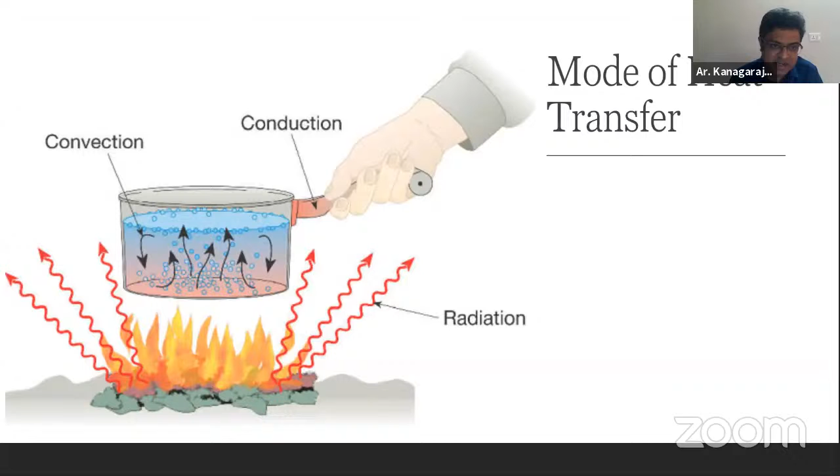When we talk about envelope, we basically revisit our 8th and 9th class physics. There are 3 modes of heat transfer, all of us know: conduction, convection, and radiation. And envelope is any surface which distinguishes the internal environment from the harsh external environment. It can be your roof, wall, windows, or the floor.

And there are also situations where the pressure at the windows is not sufficient. Then we might need some kind of mechanical ventilation to exhaust the air. So this is how an envelope basically contributes. And our main objective is, whenever the temperature outside is 40 or more degrees Celsius, we need to still maintain 22 to 24 degrees Celsius inside the room.

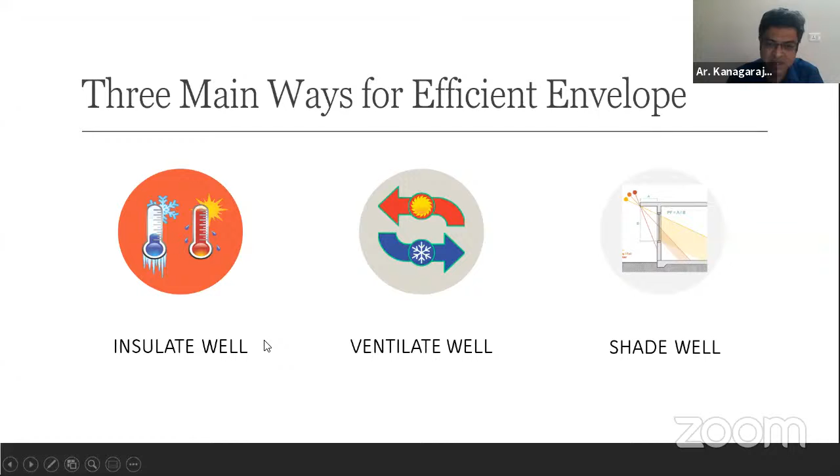So it is very important for us to ensure that less heat comes inside the space, so that we get better comfort inside the room, as well as less energy consumption for space conditioning equipment. So 3 principles which I'm going to talk about today, you can call it a mantra. In these climates, you have to insulate the building well, you have to ventilate the building well, and you have to shade the building well.

So if we look at the building envelope without insulation, we can see that a lot of heat actually comes through conduction and also through radiation. So it is very important that whatever component distinguishes the outside environment from the inside environment, we insulate it well. By insulating, we can have better thermal comfort inside the space, as well as lower energy consumption for our space conditioning equipment.

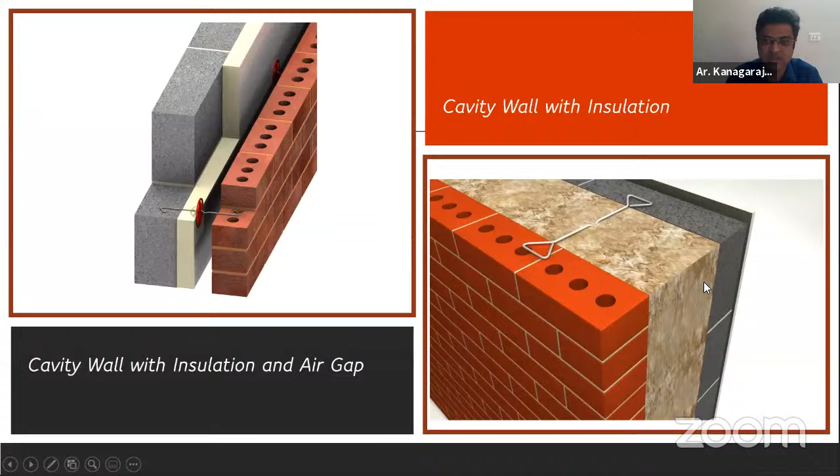So how do we insulate? For walls, we can have cavity walls where the cavity itself can act as insulation. And there are also different materials like expanded polystyrene, extruded polystyrene, or glass wool and rock wool kinds of insulation. You can use them to improve the thermal performance of the wall.

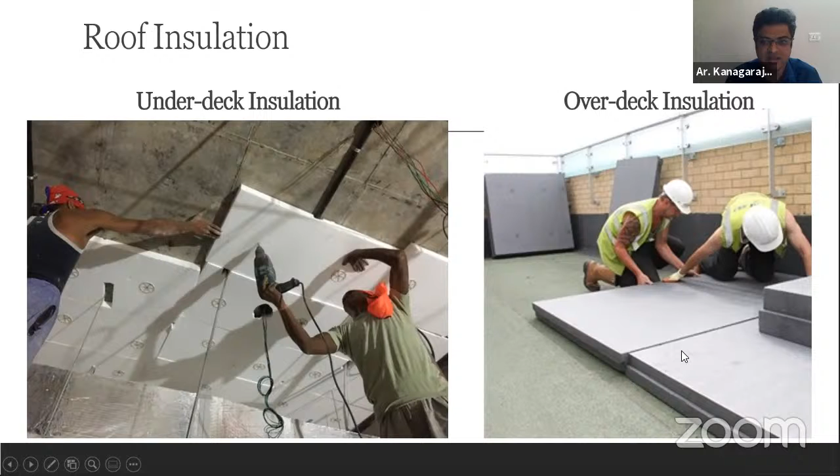The second thing which is important to understand is the roof. The roof gets a lot of solar incidence, around 3 to 4 times more than the wall. So it is very important for us to provide treatment to the roof. This can be in the form of underdeck insulation, which you put below the slab of the building, or you can provide it on the overdeck, which is on top of the slab. The overdeck is better because heat moves from the hotter side to the colder side. So the more you put it on the external surfaces, the better the insulation performs.

Another thing you need to ensure is that roof finishes should be either white, green or blue. White is like what we had in traditional times, when we used to do lime plaster or lime wash. Similar to that, we now have tiles as well as paints which reflect a lot of the radiation falling on the roof surface. Or you can have a green roof, or you can have photovoltaic or solar thermal on your roof, which further shades the roof below. So the roof should not be exposed and should have at least one of these treatments as a surface finish.

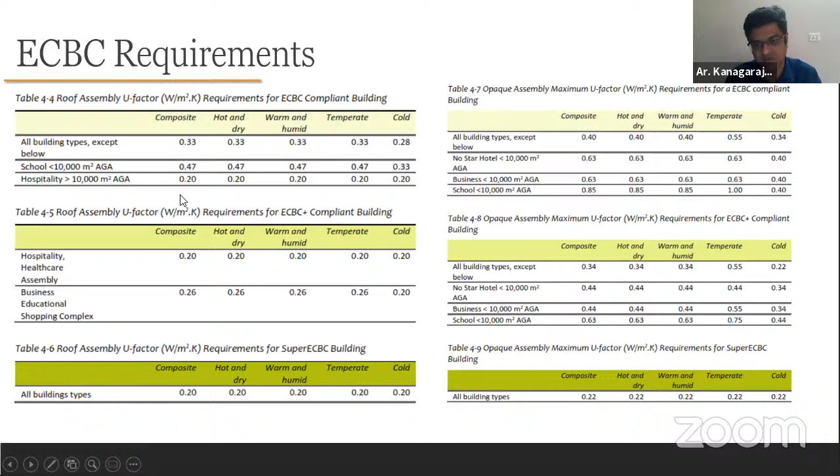The Energy Conservation Building Code mentions the conductance value for the roof and wall assembly for different climatic zones of the country and for different types of buildings. I will not go into the detail of it, but the lower the conductance of the material, wall or roof, the better it is for the tropical climate.

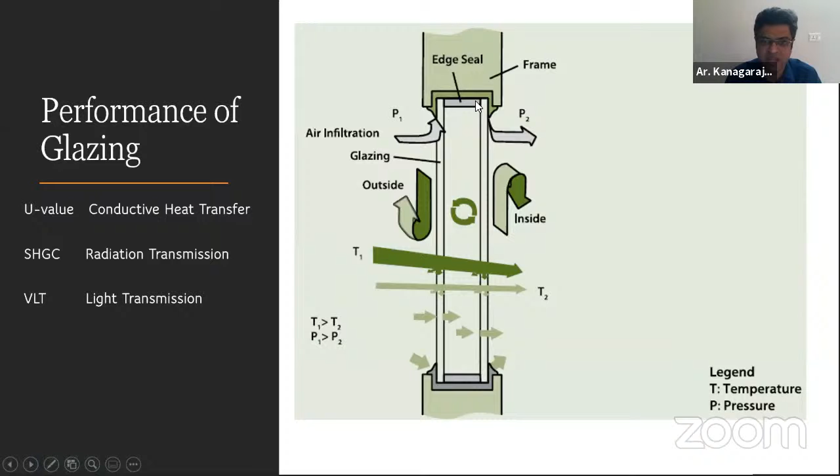The third component of the building envelope where we need to pay attention is the windows. Windows usually consist of glass as well as the frame. So we need to use good double glass, which reduces the conduction heat gain from the glazed part of the window. We also need some kind of film which does not allow the solar radiation to come in. This can be obtained by using double glazing and frames which are either wooden or UPVC, or if you are using aluminium, then you have to have thermally broken frames.

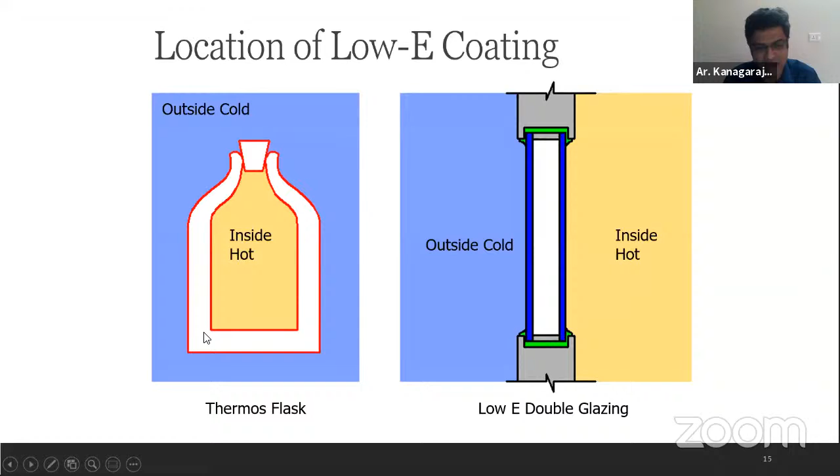When we look at double glazing, it is almost similar to the flask we have. Some of you would have seen a broken flask, and inside it a silver lining. These flasks can be of two types. Either it can store a hot item inside so it does not get cooled, or it can store a cold item inside. So whenever we go to buy a flask, we ask what kind of flask we want. It all depends upon where the silver coating is. If the silver coating is on the inside part and the next thing around it is a vacuum, the hot thing will remain hot inside.

This is the same situation with the window. If we are considering a colder climate where outside is cold and inside is hot, then you need to provide a film on the inner layer of the inside glass. But in the hotter climate, outside is hot and inside is cold. We know that heat flows from the hotter to the colder side. So we provide a film on the inner layer of the outside glass. So that is more about insulating the building.

The second thing is ventilating the building. Ventilating the building is also a very simple concept.

We know that hot air tends to rise up. So we need to provide openings so that the hot air can go out, and this is called stack effect. So you need to design your openings in a manner that you provide cold air from the bottom and then basically the hot air goes up. But there are situations where the outside air is not sufficient to provide ventilation. So during those times, you need to have some kind of a mechanical system to ventilate it.

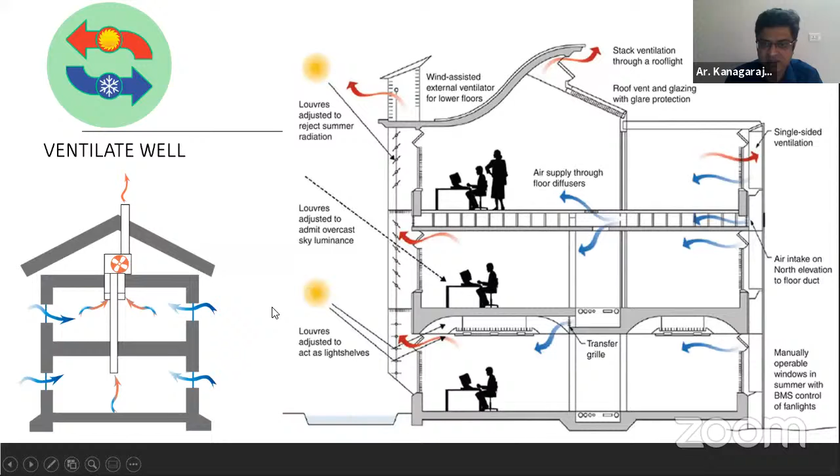So these are the three modes of ventilation. One, you can have natural ventilation or a cross ventilation, where the air comes from the window and whenever the outside temperatures are better, you ventilate your building. The second one is to use an exhaust fan. And the third one is to have both, like we call it a mixed mode operation of the building, where you can run the building on an air conditioner mode whenever outside is not conducive. And whenever the outside is comfortable, at that time you try to bring the good part of the air inside and provide thermal comfort.

This is very important in today's context, especially when we are facing this pandemic, where most of the buildings which do not have openable windows are facing challenge for the fresh air. So it is very important in the future building that we develop them as mixed mode operation buildings. Another thing is you need to provide taller windows. So the taller windows have a good heat rejection possibility where cool air can come from outside and warm air can go from inside. So whenever you are designing a window, ensure that a part of the window which you are going to use for ventilation purpose, you try to put it as a longer aspect ratio window.

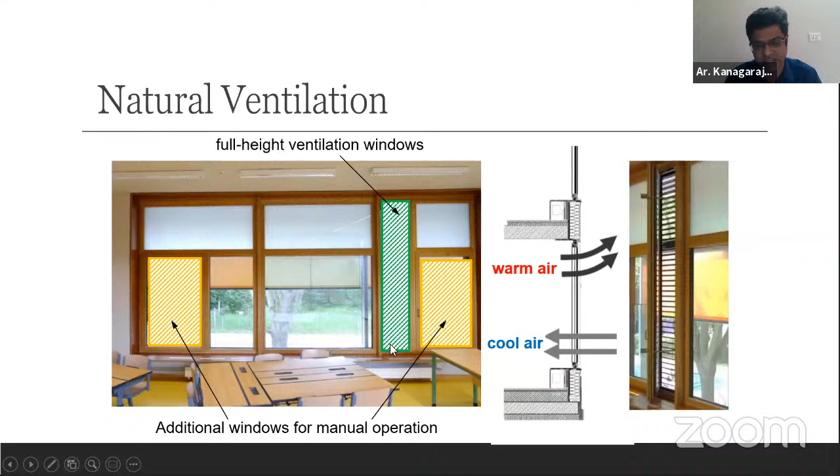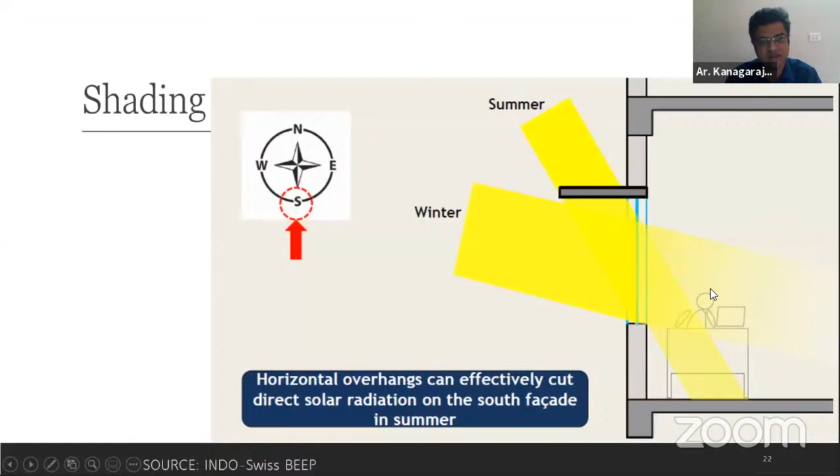Then we need to ensure that we shade well. So after insulating and after ventilating, we need to also ensure that we shade well. And in India, you will see that in the summer times, we have a high altitude sun. And during the winter time, we have a low altitude sun. So sun rises from the east, moves towards the south and goes towards the west. And only in the southern part, as you go below the Tropic of Cancer, you will find that the sun also comes on the northern facade. So there you have to shade the northern facade also. So our main objective of the shading is to cut the summer sun, but allow the winter sun to come in. So the shading, you can do it through the following means.

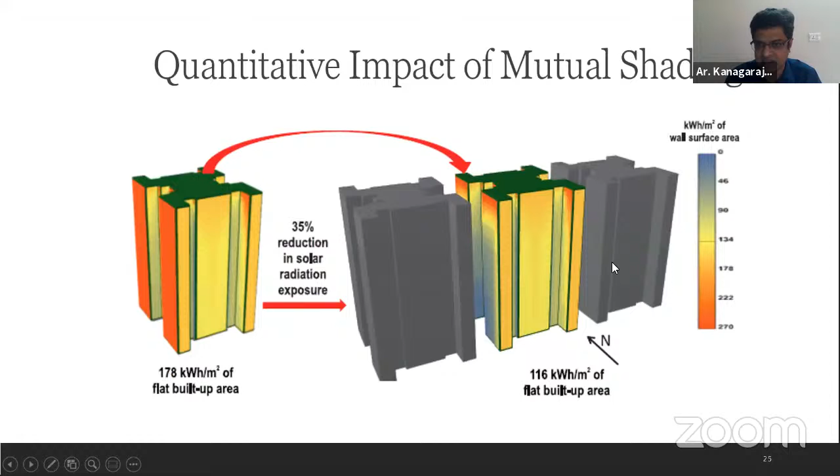You can have mutual shading. So whenever you are trying to place another building, like a residential tower next to the first tower, it would be useful if you can provide this tower on the east or west compared to the north side, so that we can take the advantage of mutual shading. So this is the slide which shows that if you put buildings next to east and west side, you get a better mutual shading impact. The second thing is to look at self-shading. You can have various projections in your building so that the building shades itself, again lowering the heat gain through the radiation part.

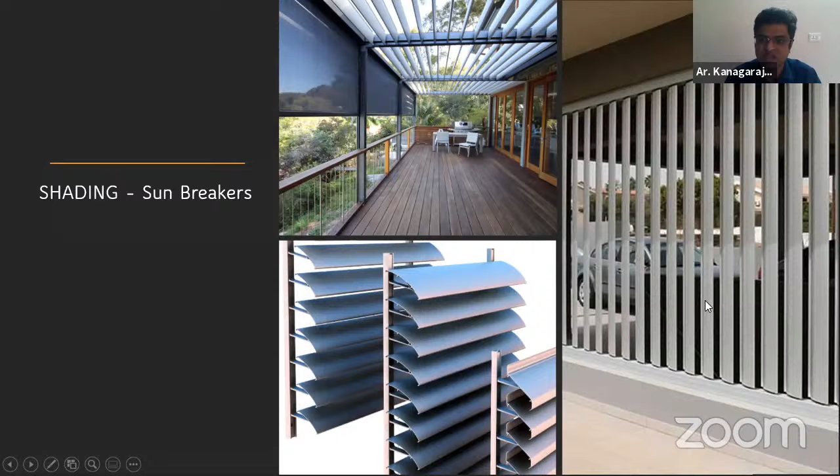Then the next thing which is getting quite popular is to provide shading outside. So like the way you have a curtain or the Venetian blind inside, it would be much better if you can provide the shading device outside, because once the radiation comes inside, it becomes a part of the cooling load of the building. So we really need to ensure that we cut the sun outside. So windows are like eyes for the building, and whatever culture we are in, we shade our eyes. So the buildings also starve for eyes, shading systems. So we need to ensure that we design the shading system well, and this is the most critical part because this leads to a lot of heat gain inside the building.

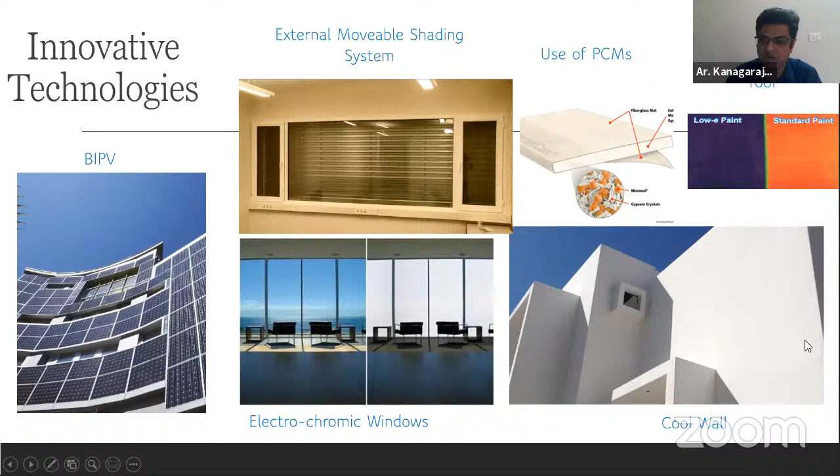Another interesting thing is whenever you shade something, that is the place where a lot of radiation actually falls. So automatically they become a good place where you can put photovoltaic for shading, for getting electricity generation. So one can also integrate them. A few more technologies which we need to look at from the envelope point of view. These are like building integrated photovoltaic, external movable shading system, which I talked about. Now it is also getting very popular to use phase change materials. There are these electrochromic glass, which when the radiations are good outside, they become transparent, and as soon as the radiation starts falling on the windows, they basically switch their properties. And similar to the cool roof, we now are also talking about cool walls.

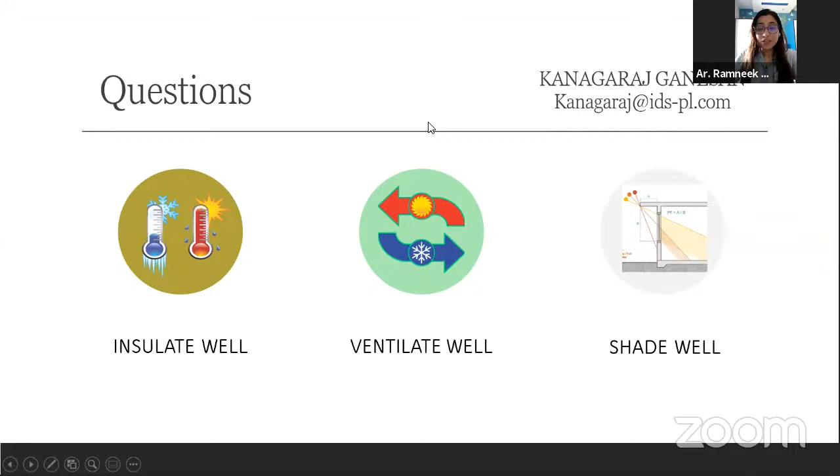Over to you, Ramneek. Thank you so much, Architect Kanagaraj. Sir gave a very good presentation on building envelope. He gave us an overview of different types of insulation that we can definitely adopt in our buildings, and also to keep it cool in the form of insulation. Certainly, even ventilation is an essential part of our building working. And Architect Kanagaraj explained it really well. Thank you so much, sir.

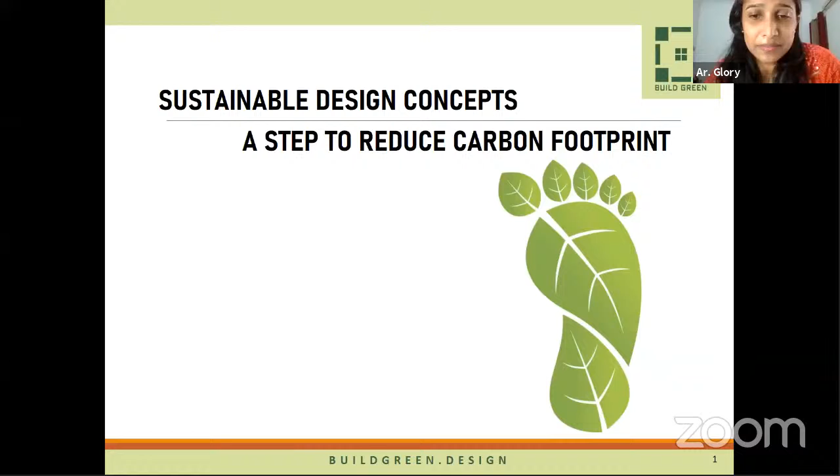The Kyoto Protocol is one of them. India is a party to the United Nations Framework Convention on Climate Change, UNFCCC, and the objective of the convention is to achieve stabilization of greenhouse gas concentration in the atmosphere at a level that would prevent dangerous interference with the climate system. To strengthen developed country commitments, the parties adopted the Kyoto Protocol in 1997, which commits developed country parties to have carbon dioxide emissions 5.2% below 1990 levels.

PEDA is designated as the nodal agency for carbon credits and clean development mechanism, for eligible projects within the state for the Punjab government. Talking about clean development mechanism, Punjab State Electricity Board has been one of the pioneers. When huge transformers are installed over a very long distance, there is voltage drop. But when small sized transformers are installed, it reduces the voltage drop and hence the wastage of electricity.

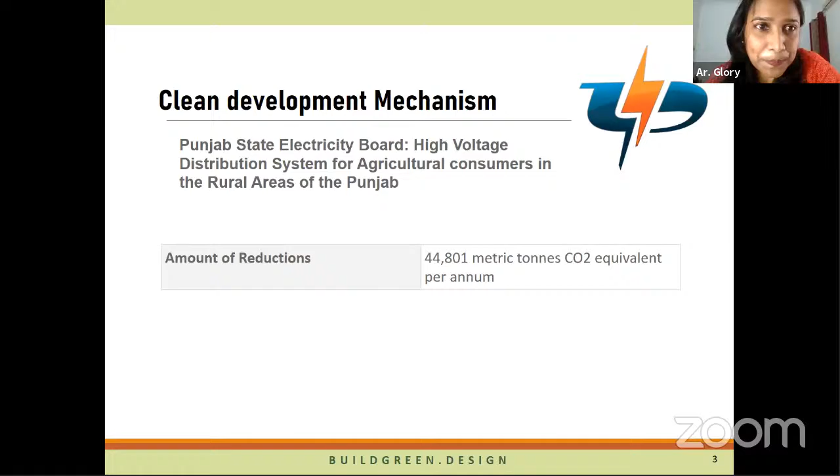Again, we have the Paris Agreement. As per the Paris Agreement, the overall global objective is limiting the global temperature rise to no more than 2 degrees centigrade above pre-industrial levels. However, we need to pursue efforts to limit the global temperature rise to 1.5 degrees centigrade.

The current annual emission that we see is around 52 gigatons. With the reductions we are already doing, if it continues the same way, by 2030 it will reach around 52 to 58 gigatons of carbon dioxide. Even during the COVID times, if you can guess, the carbon dioxide emission reduction was hardly 5 to 7% of the total. Even after so much disruption in the growth of the economy, there has been only a 5 to 7% reduction in carbon emission.

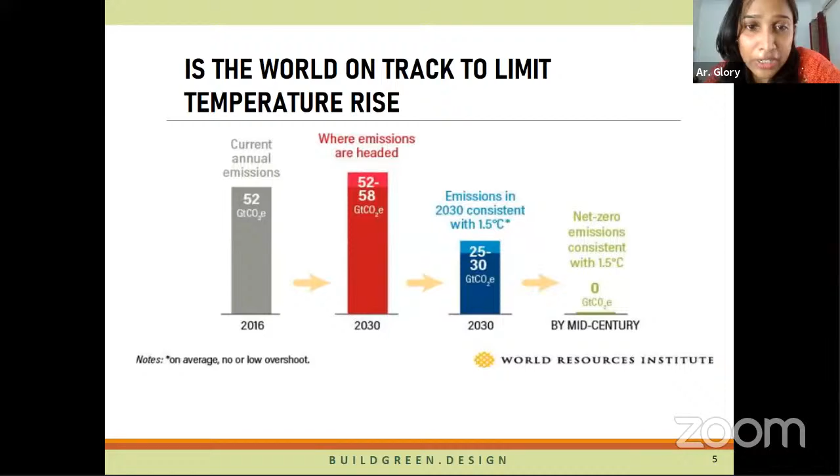So that brings us to the point that we need to have a larger picture to work on, develop new technologies to get into this 25 to 30 range, so that we can reach the 1.5 degrees target. And by the middle of the century, we need to limit it to zero emissions. Only then is our world going to combat climate change. If we do not take any corrective measures, by 2100 we see almost a 4 to 6 degree rise in temperature. And if we do take up some measures, it is up to 2 degrees.

Now, if you can tell me, maybe in the chat box, what was the average temperature during the Ice Age? Right now, the Earth's average temperature is around 15 degrees centigrade, right? And during the Ice Age, what was the Earth's average temperature? It was around 9 to 11 degrees.

So you can very well imagine that from the Ice Age to the present scenario, the temperature range has been just 4 to 6 degrees. And by 2017, we had already reached a 1 degree increase. So the entire environmental balance would go for a toss if this situation is not taken up with urgency. So how do we do that? By reducing the carbon footprint.

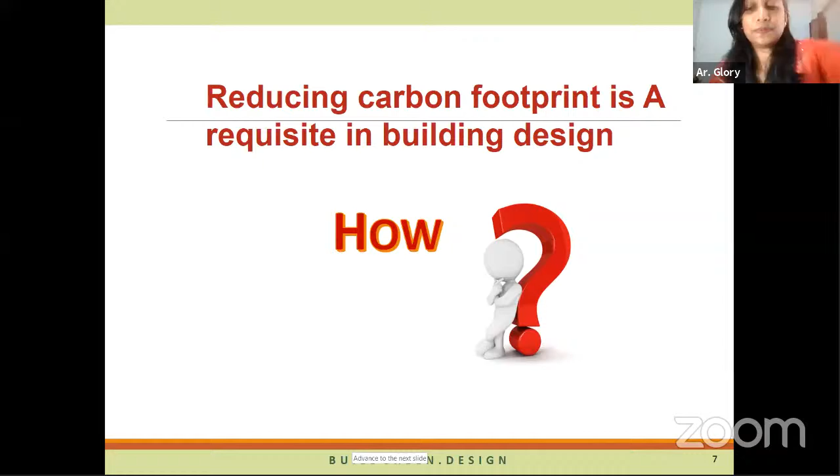The entire week has been a very enlightening week for all the participants on what measures can be taken up. Mr. Kanagaraj just now explained very well what measures can be taken up. Those are the primary measures. First of all, we need to start early. We need to evaluate and measure the building's design carbon footprint as early as possible, and that is when most of the opportunities for reduction are possible. At the early stage only, we can opt for alternative layouts, materials, and details that can be refined to use less material. As the design progresses, these opportunities start diminishing.

Part of this early planning involves life cycle assessment, on which the carbon footprint is based. It is a process of considering all the flows, the energy, the water, the material, the waste in and out of the system, to calculate the environmental impact. The orientation is the basic. Passive design depends a lot on the building orientation. Orienting the building in such a way that it takes maximum advantage of the sun moving across the sky is the ideal way to take it up.

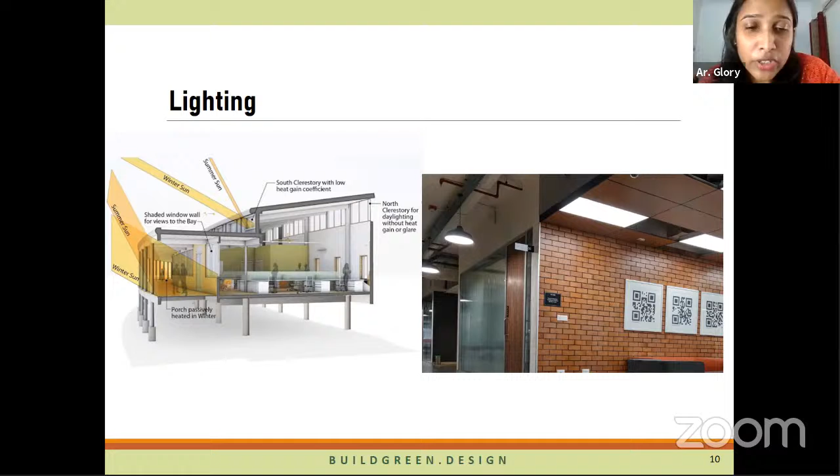So the thermal gain lowers the carbon footprint, but too much thermal gain in summer causes overheating and increases the need for cooling too. So solar control window films are also available, which can reduce the carbon footprint by cutting down the energy expenditures by up to almost 30%.

Then of course, natural ventilation plays a very important role. It's very effective where the climate has ambient air temperature that can be used. So maximum advantage should be taken of the ventilation. Then HVAC definitely plays a very important role. It takes up almost 40 to 50% of the carbon emission. So the most efficient HVAC systems should be adopted, and that would help in maintaining the carbon footprint.

Water usage: the major factor contributing to the carbon footprint of the building is the amount of energy expended to supply, treat, and use the water. The water-oriented strategies significantly reduce the energy use and the greenhouse emissions. Designing for water conservation, efficiency, and reuse is one of the largest and most cost-effective carbon reduction strategies available.

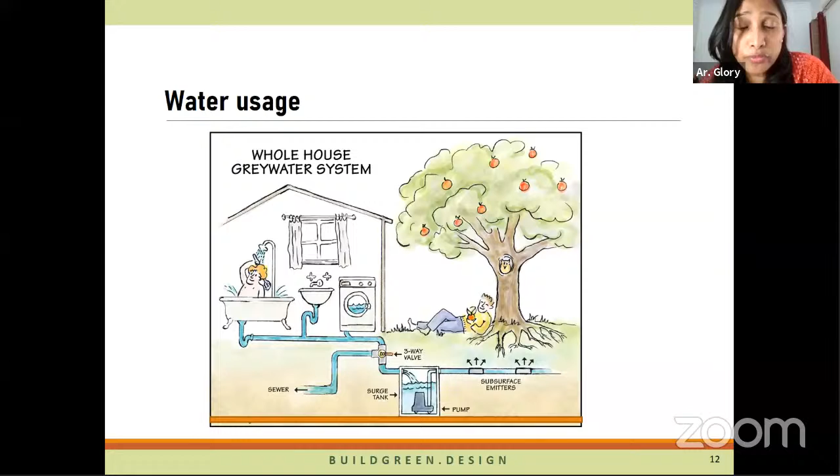Then use rainwater as a valuable water resource, design buildings to harvest the rainfall, and create outdoor spaces that rely primarily on precipitation for irrigation. Rainwater harvesting and xeriscaping can reduce almost 50% of the outdoor water use. Then water for flushing, irrigation, and washing machines need not be potable water. So using the rainwater directly from the building's roof, all these measures can help in reducing the carbon footprint.

Then recycled content in the materials used in the building: choosing recyclable building materials that have less effect on the environment. When we talk about renewable energy, the entire building's carbon footprint can be reduced by sourcing its operational energy from environmentally responsible resources, or by generating renewable energy on site, using the walls or roof of the building for a photovoltaic system and generating electricity through this system, which can impact the entire carbon footprint of the building.

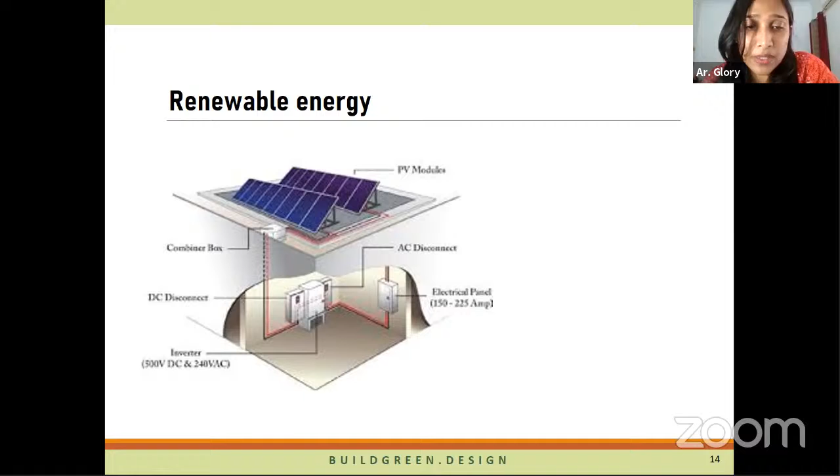Insulation: as Mr. Kanakra just mentioned, there are millions of ways of insulating the building through the materials you are already using. For instance, a single brick thick, 9-inch brickwork has a U value of 1.78. But the same brickwork can be arranged in different ways, like a rat trap. If the bricks are arranged in a rat trap manner, you already have an air gap between them, and you can easily reduce the U factor, which helps with insulation.

There are many developers and organizations who do not want to move out of the brick concept or adopt new technologies like AAC blocks. So they are experimenting and taking up measures like providing air gaps between the brickwork, and that is one of the ways they are opting for insulation. So these are a few tips and tricks that anyone can adopt while constructing the building. So these were a few of the measures for how we can approach the carbon footprint.

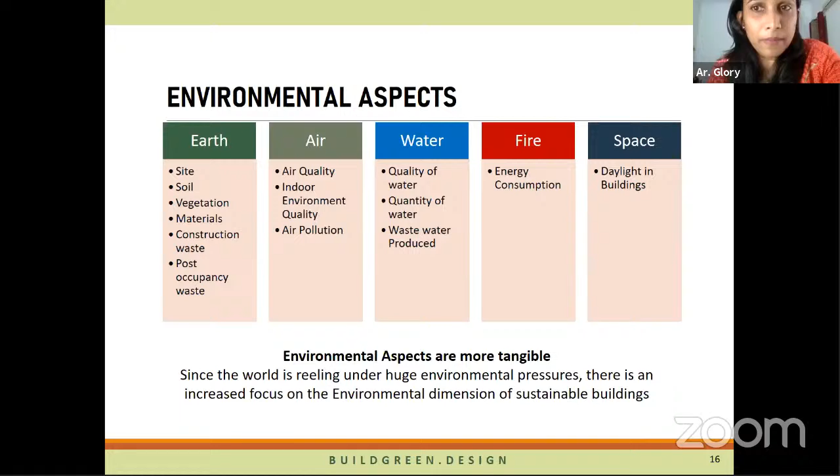Now these concepts can be divided under these three main heads. All the five environmental concepts we just discussed, the five elements of nature, can be divided under these three heads. The green building, which is the normal practice that we are creating.

This is a practice for creating structures using processes that are environmentally responsible and resource efficient throughout the building's life cycle, from site to design, construction, operation, maintenance, renovation, and deconstruction at the end of the life of the building. So here, green buildings mainly focus on the environmental dimensions of sustainability, and the other dimension, the social dimension, takes a little backseat. I'm not saying that it is not being addressed, but there is a greater focus on the environmental aspects when we talk about green buildings.

The next is the climate responsive buildings. These buildings respond to the climate constraints through their design and construction. However, the aim of these buildings is only to respond climatically, but fortunately, many climate responsive buildings traditionally qualify to be called sustainable buildings because they not only respond to the climatic conditions, but also use the best of the materials, the best of the available resources, and ones which are easily renewed in nature. However, the main aim of the building is to respond to the climate of the space. I'll take the example in the next slide.

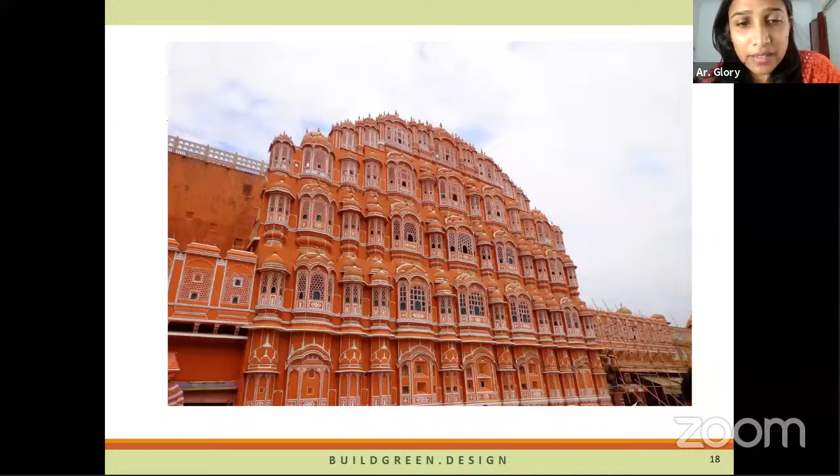So this example is for the climate responsive building, the Hawa Mahal. It is an apt example, I would say. Although it is extremely resource intensive because it uses stone extensively, it creates an absolutely comfortable environment indoors because it responds to the climate. So what is the main aim of the building? It is mainly to be climate responsive and thermally comfortable, and that is why it is a perfect example of a climate responsive building.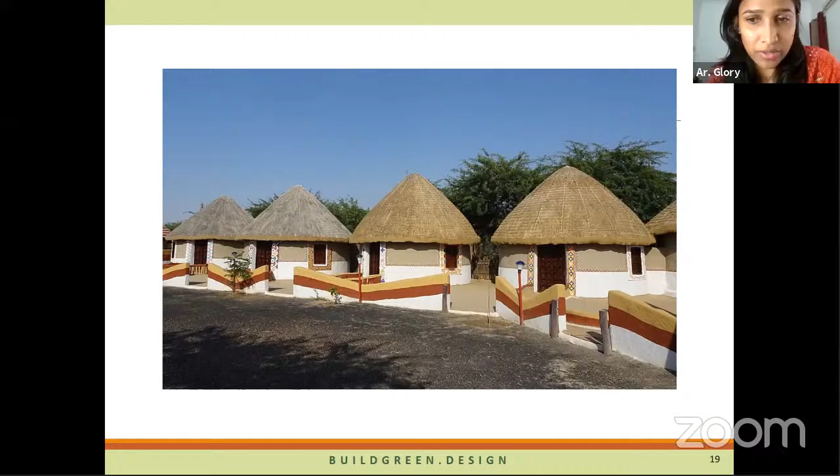Now, this one, if you see, is also a sustainable building and a completely ecological building. This entire setup emerges within the surroundings. It uses the materials which are conveniently available in the surroundings. It does not affect the ecology around these buildings. Such buildings only enhance the ecology around them and do not disturb it.

Now, when we talk about green buildings, there are lots of building rating systems that have come up. The most popular concept, we would say, is the green building. It is the building which uses less water, optimizes energy efficiency, conserves natural resources, generates less waste, and provides healthier spaces for the occupants as compared to a conventional building.

Out of all the concepts related to sustainable architecture, the green building concept has become very popular for a few reasons. One, green building rating systems have come into place, and because of these rating systems we can assess the performance of the building. We know where the building stands, so there is a benchmark, a comparison between buildings, and we know what performs and what doesn't. In this way people can monitor and hence get motivated too.

This has actually driven the market, because these rating systems are the most popular concept in the sustainable architecture domain. We hear about green buildings and rating systems almost every day. The fundamental reason, I repeat, is that measurement is possible through the assessment tools. Various tools are available.

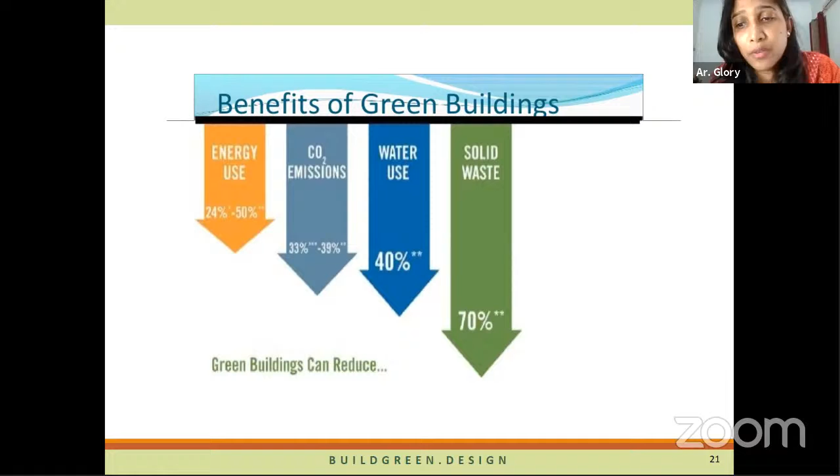And at a global level, we are looking at benefits like getting away from global warming, climate change, and forest protection; all these benefits are there at the global level. So green buildings come with a lot of environmental, economic, and social benefits through the characteristics and aims which we have set for green buildings.

We will just make a quick comparison between a green building and a sustainable building. Both are green, but a green rated building and a sustainable building. There are somewhat contradictory opinions on what sustainable building and green building imply. Green building often looks at the environmental dimensions, while the sustainable building looks at the 3 dimensions in an equal capacity.

However, as I mentioned initially, when we go on to monitor it, that becomes difficult. The environmental aspects are easiest to measure and monitor in the rated building. For example, if we say there is a sense of belongingness to the building, how do we measure it? We cannot measure it. So those things also get attached to a sustainable building.

In the Holy Guru Granth Sahib, there are many shlokas which are laying stress on saving the Mother Earth. Likewise, Quran में भी बहुत सारी ऐसी आयत included हैं which are advising mankind to save the environment. Similar are the verses in the Bible too.

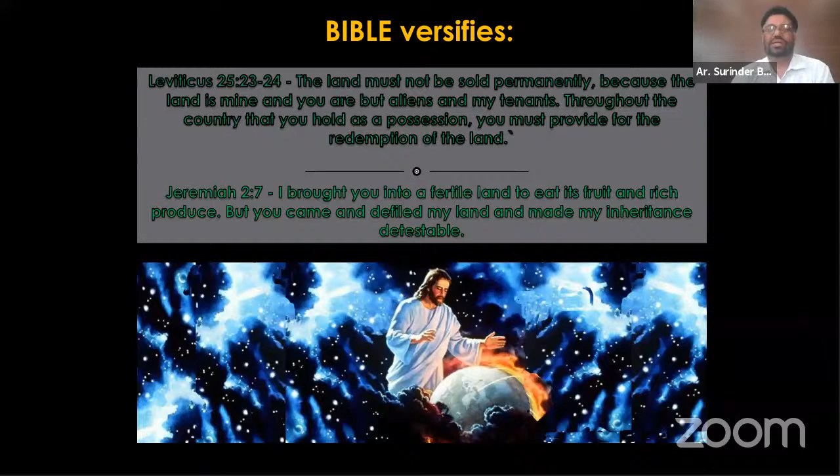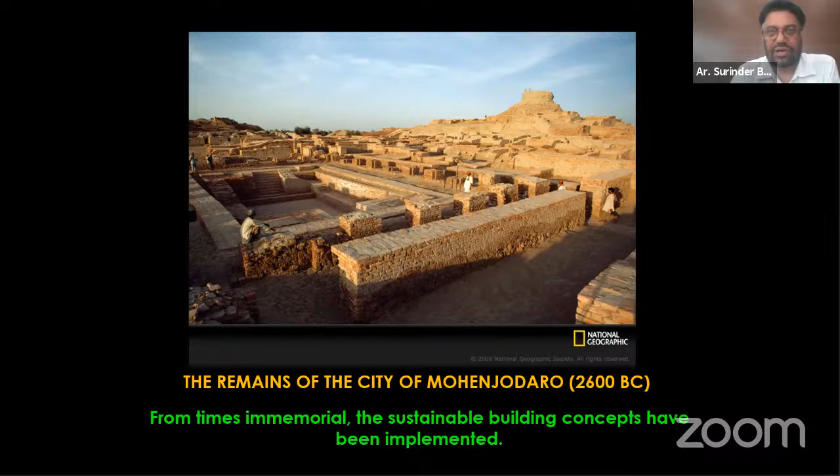When we talk about sustainable architecture, it means taking less from earth and giving more to people. We all know that buildings consume about 48% of the world's energy. And if we look at the historic overview of India, this is the picture of Mohenjo-daro township. When this was designed in the year 2600 BC, our forefathers took care of the wind direction, the local materials, the drainage system. This was the drainage system, which was well planned and laid out there. Look at how many years back India was so advanced.

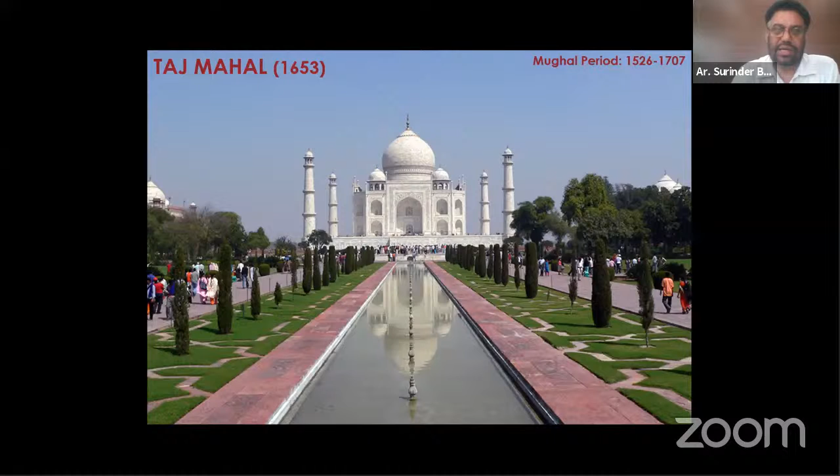So ultimately, they transferred the architect, and this glass cladding was done, and the facade was changed. The result is that this building works like a furnace. Whatever amount of air conditioning we use there, it cannot be comfortable. And when we talk about what should be the approach to design energy efficient buildings, we all know that buildings consume electricity in heating, cooling, lighting, water heating, etc.

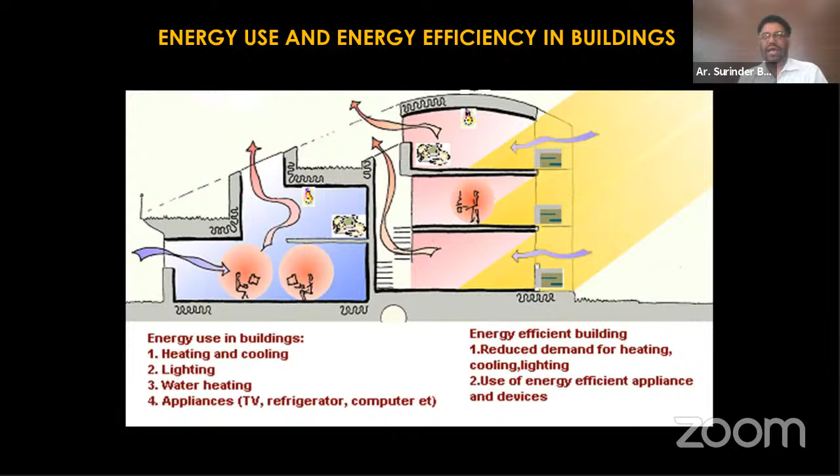An energy efficient building is one where we design certain features and plan certain things to reduce the consumption of electricity. As Kangaraj sir has said, India is divided into various climatic zones. There are 5 zones, and one is the composite climate region in which Punjab falls. When we design buildings in a composite region, there are fixed parameters, the design strategies. We have to resist heat gain in summer and resist heat loss in winter. We have to promote heat loss in summers and in monsoons.

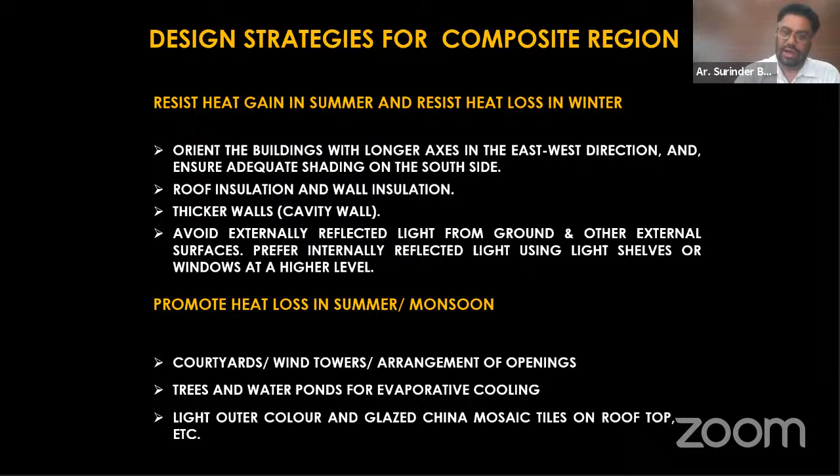I'm going a bit fast because we are running behind schedule.

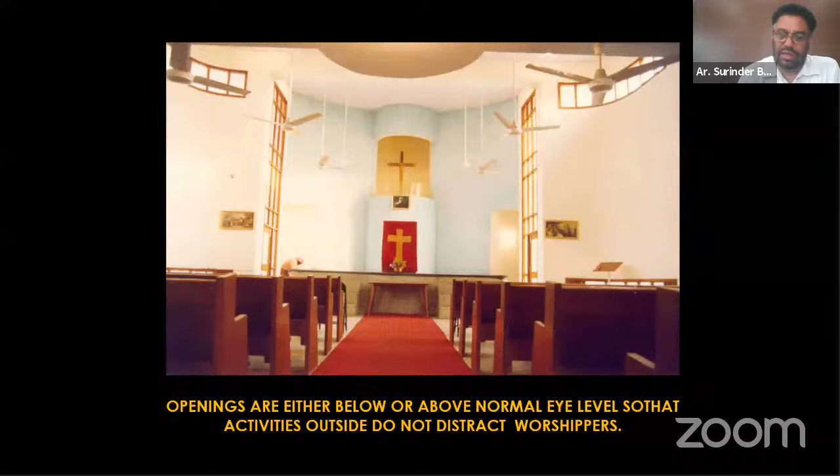Likewise, we designed this church in Chandigarh long back, and this is the western facade. On the western elevation, we opted not to put many windows because sun heat is too much in the evenings. So in this building windows are very small, or they are hidden. There's a skylight or something like this. The result is that this building works much better climatically, and it is a very comfortable building when we get reports from our users.

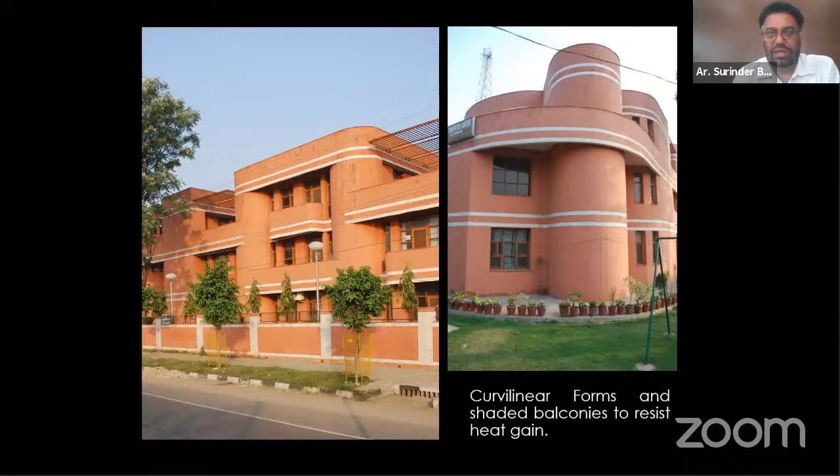Similarly, this is another building which is facing the western direction. When we were designing this, we decided to put all the toilets on the front side because this is the western side. When the western sun falls on it, only toilets get heated up and the heat is not transmitted into the dormitories where children are staying. You can see all the windows are small and properly protected, thick walls and terraces are there.

Then we designed this Yadavindra Public School in Mohali. In this school, we have taken care of how to protect the windows, and this architectural vocabulary was borrowed from the original school, which was designed by J.K. Chaudhary, a very famous architect who designed the Punjab University campus and IIT New Delhi. So we opted for a style of architecture which would fit into the existing campus.

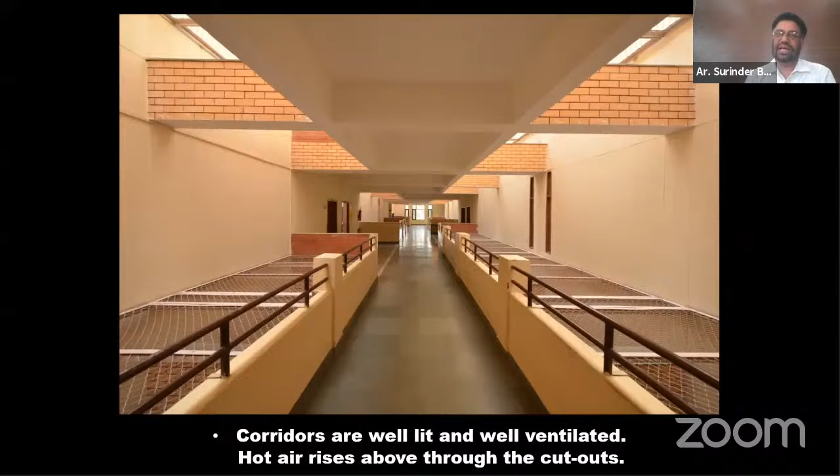In the interior, you can see a corridor running, and we have cutouts on either side. These cutouts facilitate air movement, and we bring in a lot of light from the top skylights. These cutouts are also shielding the interiors of classrooms from the noise emanating from the corridor when the children walk there.

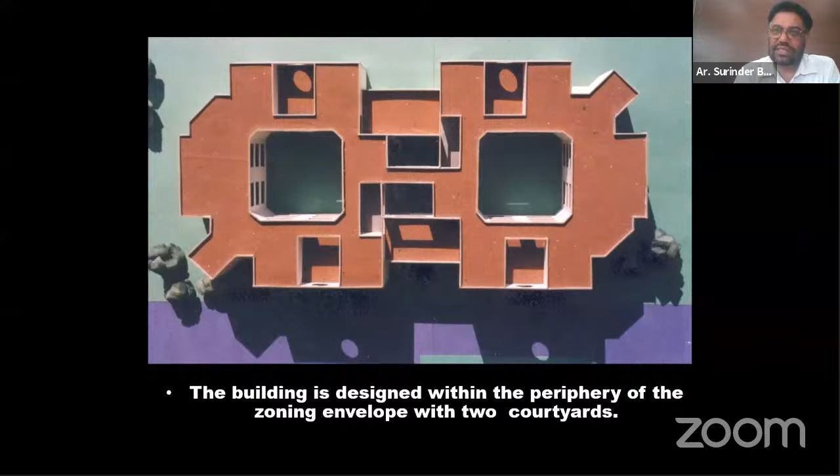Baptist School Chandigarh is another Christian school. In this school, we have tried to protect our glazings with a combination of horizontal and vertical louvers, and toilets are again brought to the western end. We introduced courtyard planning. This is the model of the same school. Courtyard planning is considered to be very traditional, but we opted for courtyard planning in a modern building because it works in the Indian climate.

Likewise, we designed a convention center in New Delhi for the Ministry of Agriculture, and we got the first prize because in this project, the brief was we are not supposed to cut any tree and we are supposed to make it energy efficient. You can see the entire roof of this convention center is made with solar panels. In addition, many other features like rainwater harvesting and solar lights are introduced in this project.

Lopo is a small village in the Moga district in Punjab. I have a friend there. He wanted to build a very, very small library there, and we both decided to have something new. This library is facing north and south, and the windows are kept above the height of the book racks, and book racks are placed along the external walls because the book rack itself works as an insulation material.

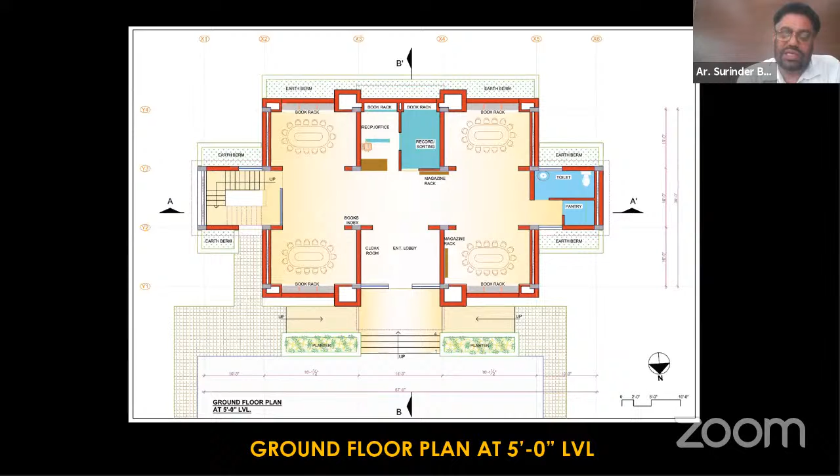On top of the terrace, we put a cooling tower, and that cooling tower cools the air, and that cooled air is brought down through the ducts. You can see these small windows which are deeply recessed, and they're facing north and south. On the eastern and western side, you can see we have a cavity wall or the toilets or the staircase block. The result is the building works even without AC and even without fans.

Then we got a chance to design a very big university campus in Punjab. It's about 50 acres, and the client wanted all his buildings to face the main road because that would give more impact to the aesthetics of the university campus.

We insisted that we should follow the right orientation, which is followed in the Punjab University campus. That is, the longer sides are facing north and south. Ultimately, we convinced our client, and these are the buildings which were made. These are academic blocks, about 8-story high blocks. All blocks are facing north and south, which is the best orientation.

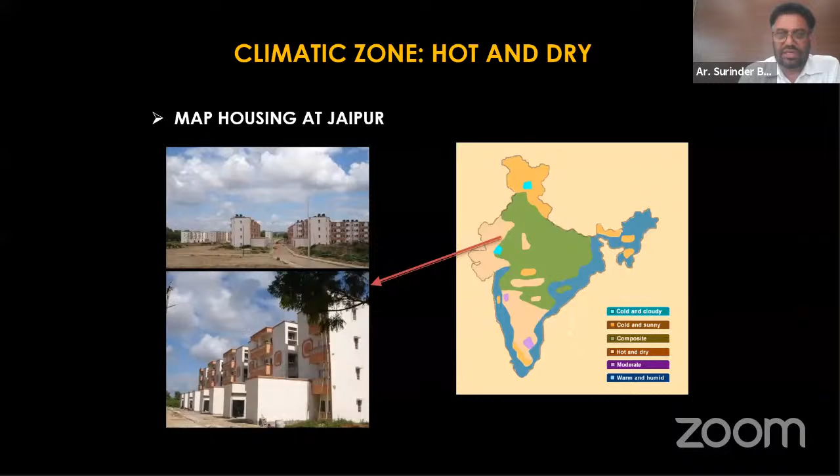Then the next climatic zone is hot and dry. In this zone, when we design buildings, this is the design strategy: we have to resist heat gain and we have to promote heat loss. We happened to design a very massive township in Jaipur for the Indian military. We made 800 houses for them.

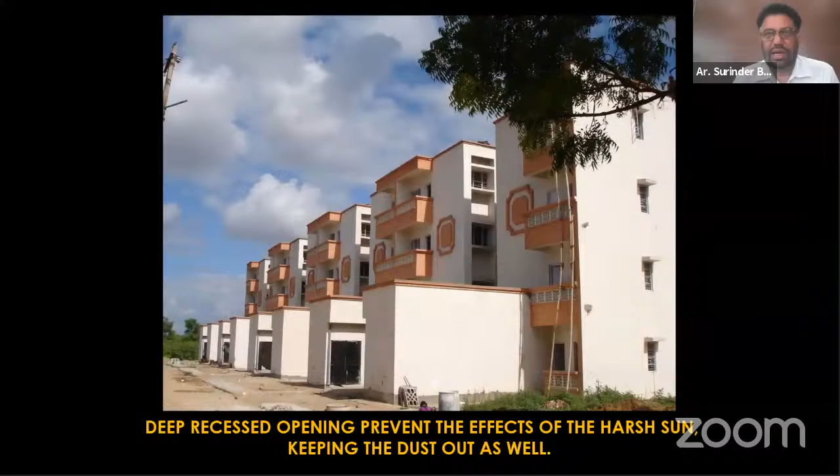Here also the design strategy was that we have to make the houses facing north and south. So 99% of the building blocks are facing north and south, and that was the only right orientation in a desert region. We opted for light colors, all the windows are properly shaded, balconies are there, and self-shading facades are there. Trees were not allowed to be cut. So that was the hot and dry region.

Now coming to the next region, which is warm and humid, we happened to design certain youth hostels in West Bengal, Odisha, and Assam. This is the coastal belt, and we get a lot of suffocation in a warm and humid region. My architect and engineer friends know that when we design buildings in a humid region, we need to promote a lot of ventilation.

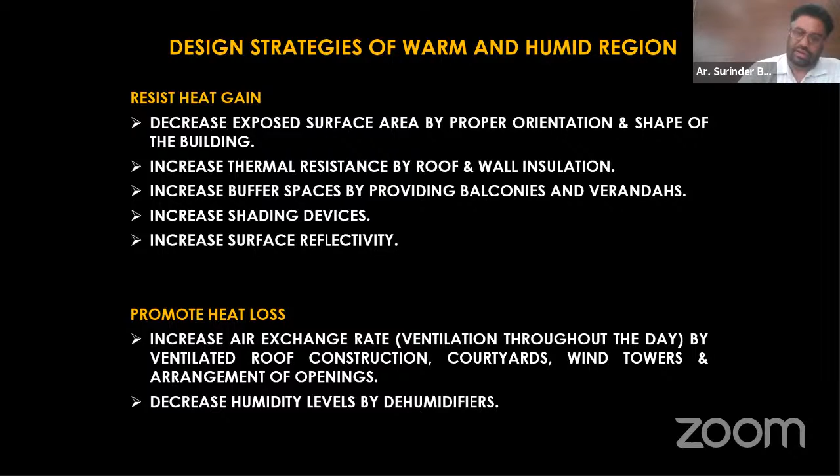So we got a chance to design a youth hostel in Burdwan in West Bengal. The site was very remote. You hardly got any proper electricity when it was made there. What we did is that dormitories are provided with ventilation from 6 openings. When these 6 openings are opened up, they get enough breeze and enough ventilation. The result is that even if there is no electricity, one can stay there.

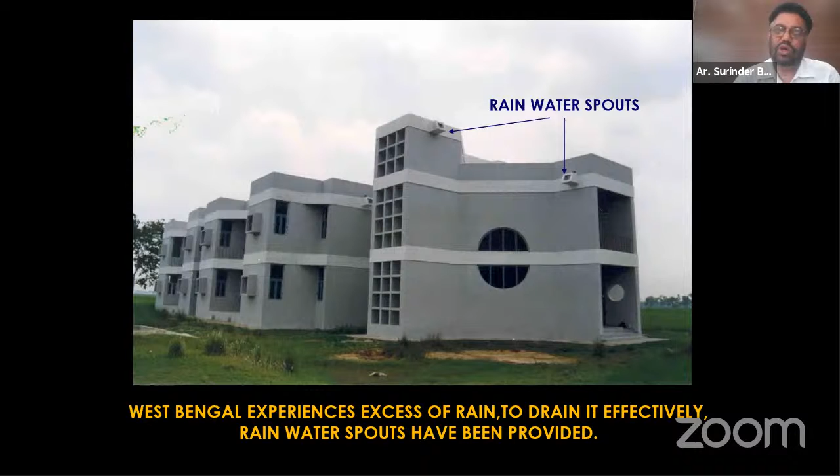Because it's a humid climate, buildings get blackened, so even the color scheme was decided accordingly. The windows are shielded with concrete boxes. You can see, because of the rainfall, we opted to have a box projection all along the window. And because rainwater pipes get choked, we opted for rainwater spouts.

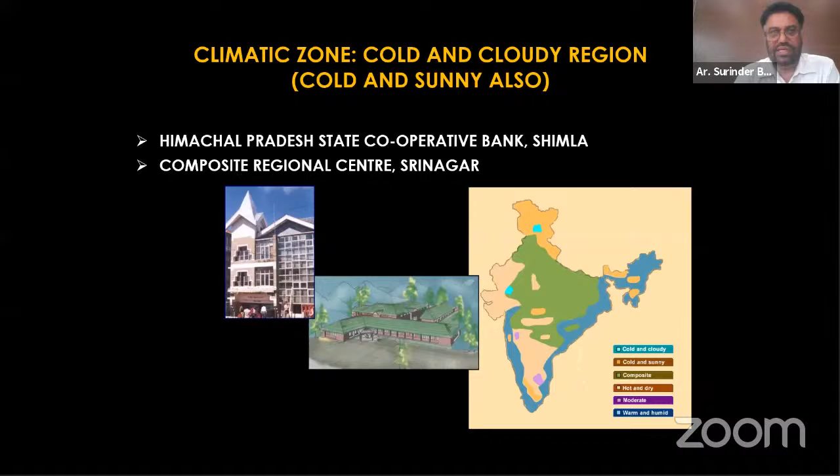The next zone is the cold and cloudy region, which is Kashmir and parts of Himachal Pradesh. Here the design strategies are totally opposite. We have to resist heat loss and promote heat gain. That is the design mantra. We got a chance to design a composite regional center in Kashmir. The salient feature of this project is that we tapered the slope at a particular angle, so that when there is snow, it falls automatically, and no mechanical or physical cleaning is required, which is a major problem in many of the buildings there.

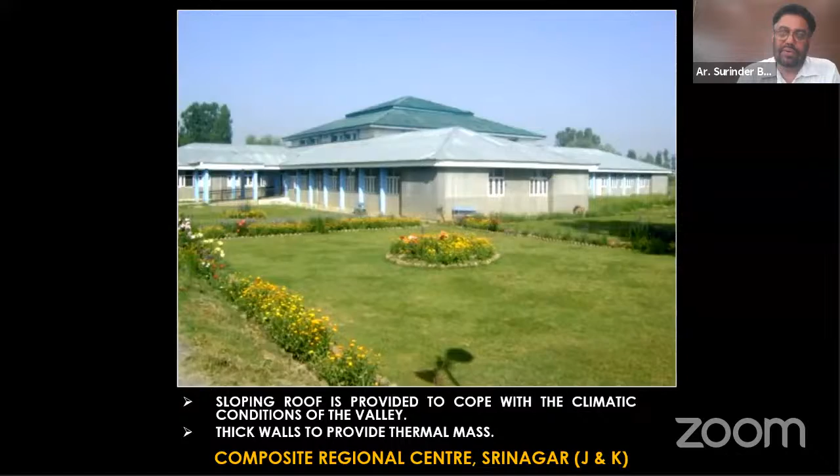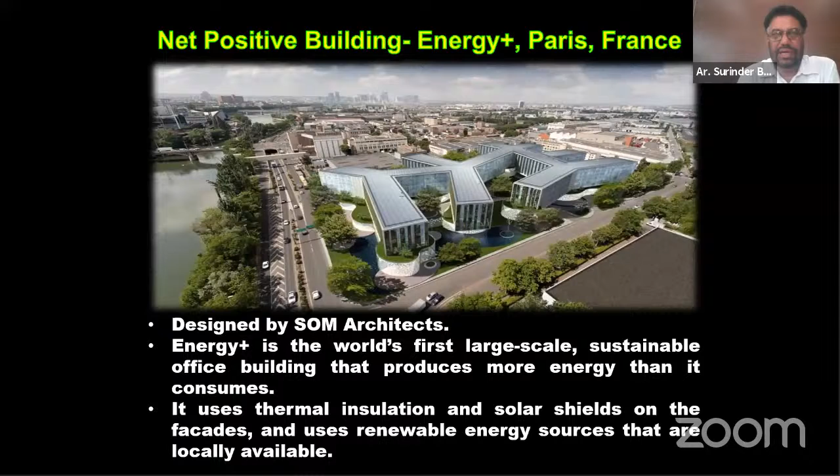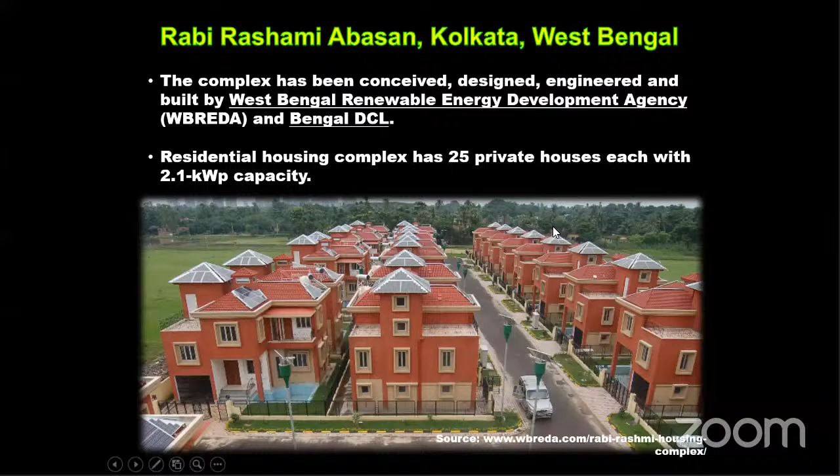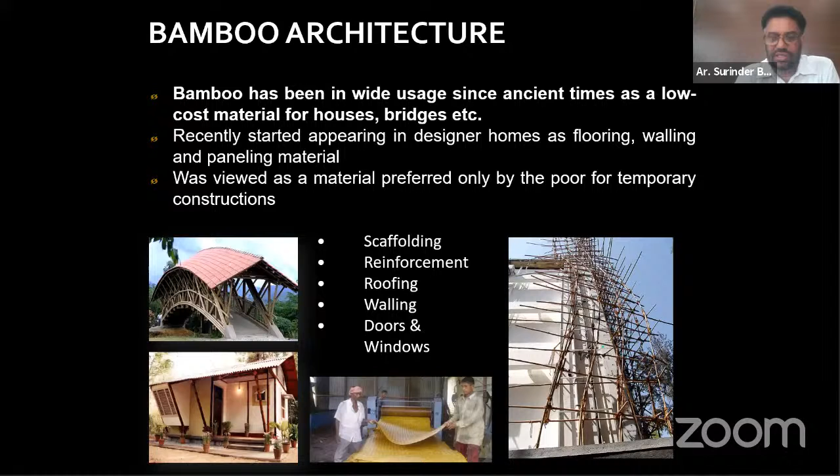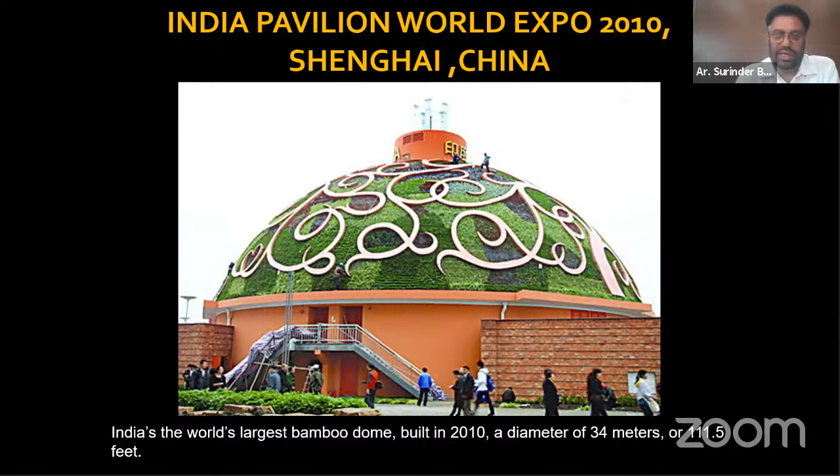And the conclusion of my talk is that when we design buildings in India, we have to take care of the climatic conditions of the country, the habits of the people, the economy of the country, the local materials. And if we do so, we can be helpful in saving Mother Earth. Thank you so much.

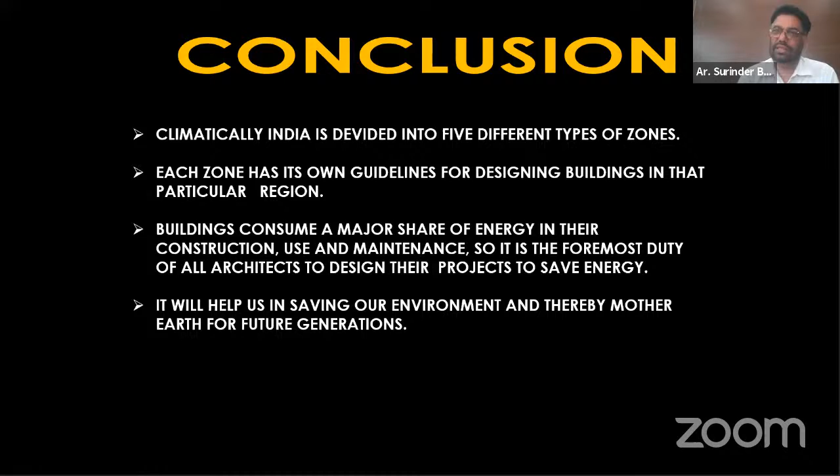A very good presentation by architect Surinder Bahga. So, sir, in his talk, briefed us on different climatic zones of India, and it is definitely advised that these buildings should be designed according to the zones. The examples he gave in the presentations fit perfectly, as those were kept in mind, keeping the user and their comfort. Exactly. And even in his last slides, he gave many examples and techniques, which definitely shows that we have to make our architecture energy efficient.

And now moving towards our last presentation of today's session on thermal comfort and strategies, I would like to invite engineer Vivek Mahajan, an ECBC expert. He is an engineer by profession, having over 18 years of industrial experience in the field of MEP, FP, and sustainability. Having experience in the US and India, his knowledge base is in healthcare, institutional, industrial, commercial sectors. And Vivek is also very well versed in the international codes and standards. Engineer Vivek enjoys speaking on energy efficiency, net zero strategies, and innovative design concepts for buildings, and similar subjects to students and corporate offices, to awaken awareness for saving energy for the long-term benefits. And today he will enlighten us on thermal comfort and strategies. We have engineer Vivek Mahajan with us.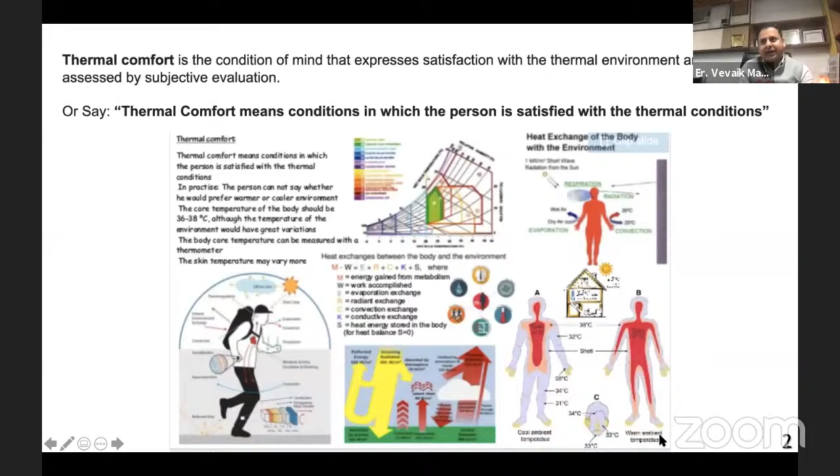So I don't want to go so much into the technical side, so I'll just try to bring a couple of pieces of information, right from the stone man to the current scenario, how thermal comfort is moving in the modern days. So let's go back to the stone man, or we say the ancient time. Our stone man used to stay in the shade during the daytime. They used to hang around here and there. In the night, they used to stay closer to the stones, where the sun had given the heat to the thermal mass, and it's basically radiating.

So this is one of the pictures of how the stone man started developing, trying to get thermal comfort. Then we see what happens when the stone man moves to the next level. He realized that only staying close to the stone will not help us out. We need to provide some sort of building envelope, some sort of proper covering, so that we can protect ourselves from numerous things. So he created a kind of chajja, a kind of hut, and then he starts getting thermal comfort in the spaces.

Then he moved on and thought, okay, let's make mud huts, mud houses, and he started building entire enclosures, right? In the old times, the bamboos, or whatever muds we used to use. So this is the next example of people moving to the next level and trying to get thermal comfort. Then the stone man realized it's not helping us out, because when we close the building envelope entirely, the heat is building up, and it becomes thermally uncomfortable.

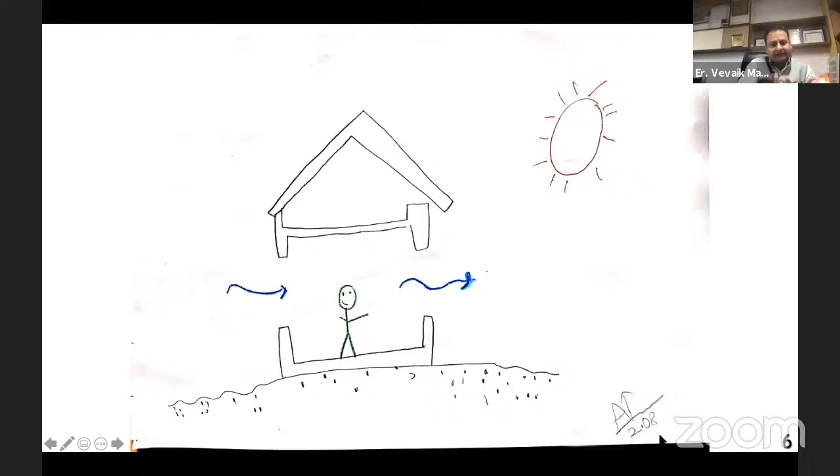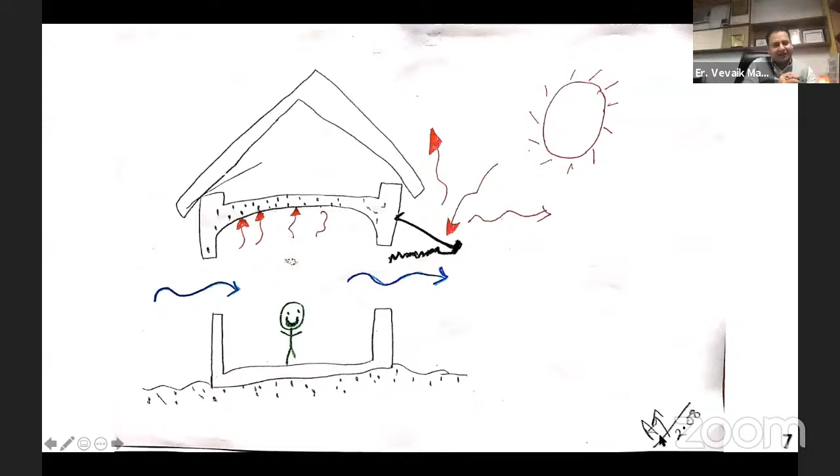So he starts opening the windows, giving openings. But again, it gives air, it gives ventilation, but at the same time the sun is directly harsh, it's not giving any shading, and it adds heat to the space, again providing an uncomfortable situation. Then the human realized, let's build some sort of insulation, proper roofs, some sort of shading devices. The humans realized that opening the windows, providing the right envelope, providing the proper shading is making our buildings and our occupants thermally comfortable.

Now, what happens in the modern building? This is a modern man. Modern man realized we are completely in the modern world, where there's a lot of honking on the roads. So we can't go with just houses on the roads, but we need proper building insulation, a proper building envelope, windows closed. But when we do that, what happens? The heat builds up inside completely, and the human becomes thermally uncomfortable. And just to protect ourselves from the surroundings, we end up putting in our systems.

So the drawings are created by my child, who is 10 years old. This is one of the presentations where I asked him to give me some help.

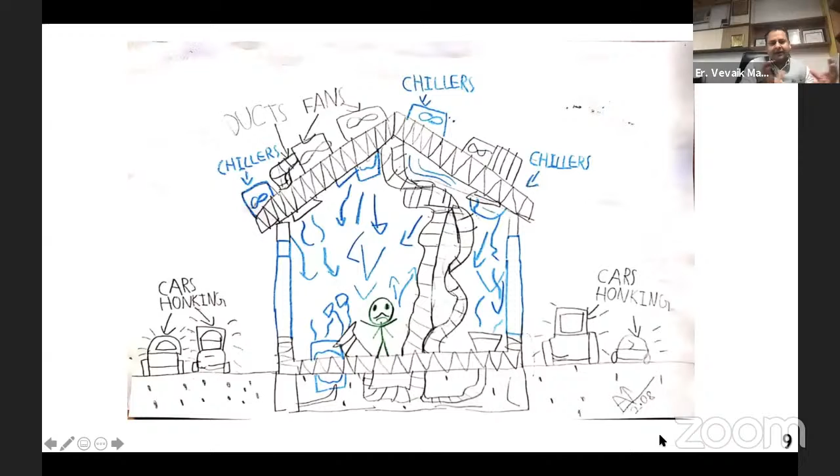So this is the current scenario. If you look at what we have done so far to achieve thermal comfort in modern buildings: we have put in chillers, mechanical ventilation, air conditioning systems, ducting, so many massive things. The intent is to show that we have gone from bare nothing to all these modern systems, and they are adding a lot of energy utilization. We all know that 50 to 75% of the energy in a building goes to active air conditioning. So that's a fundamental, very important part.

How do we control and make our building energy efficient? We have seen in the previous presentations by architect Kangaraj, by Galori, Surinder sir, how we do different designs to achieve building energy efficiency, either by passive design, a better building envelope, or better fundamental green building designs. Those are the important parameters. But again, we have to look at how we make our HVAC system efficient, because it is going to be there.

Now HVAC system: everyone in their houses has air conditioning installed. We can't even sit for a single minute in the car in peak summer, because it's like a box chamber, and the ambient is like 45 C. So technically we all turn our ACs on. So it's a mandate now.

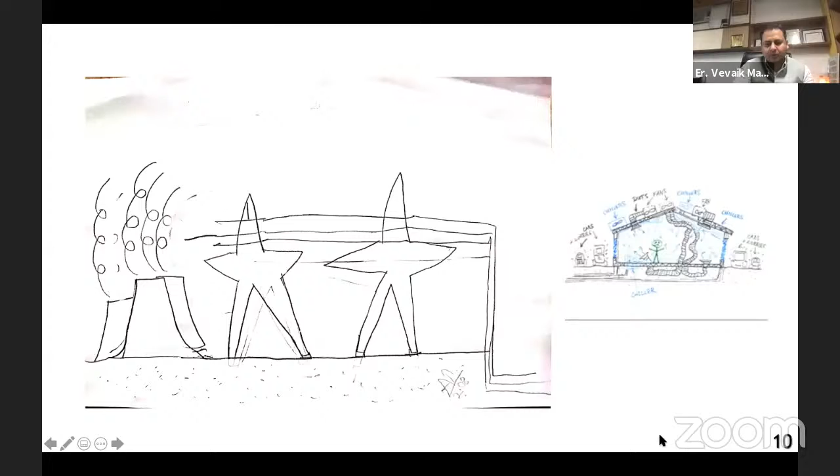Now the intent is how do we achieve energy efficiency, and this is what I'm talking about: active thermal comfort strategies, how we can make it energy efficient. What are the efficiencies we have to keep in mind to ensure our systems are not very energy consuming? So like architect Kangaraj rightly said, there are 3 modes of heat transfer: radiation, convection, and conduction.

Conduction can be easily measured in U values. The building skin, the roof, glass, wall, gives our U values. So that basically counts for the conduction to the building. Then convection we can count in the molecular transference that happens. So the relevant terms you probably see are air changes, how many air changes happen in a space, and CFM, cubic feet per minute.

For example, if we look at our split systems or our window ACs, or any air conditioning system, theoretically, in an ideal situation, we say 400 CFM per ton. So 1 ton में 400 CFM होता है. This is what convection correlates to.

Then the radiation: the easy term is solar heat gain coefficient, which is a feature of the glass, because glass is the primary source of heat transfer, through the SHGC, or what you call shading coefficient. So HVAC: H stands for heating, V stands for ventilation, and AC stands for cooling, dehumidification, or humidification systems.

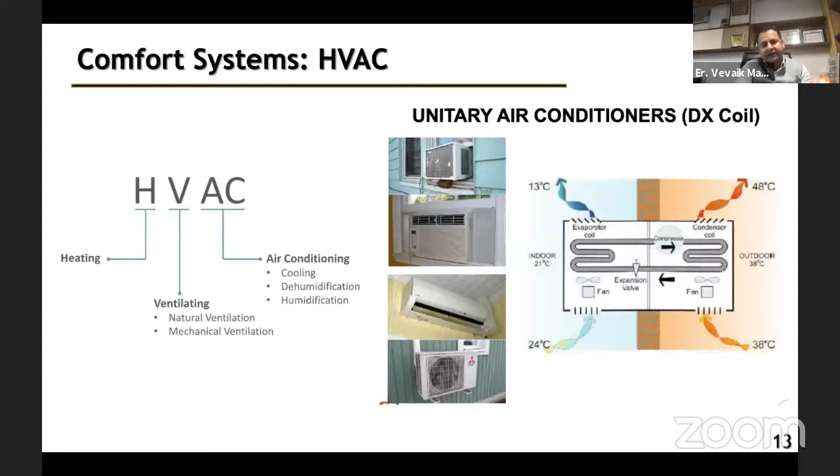जो हमारे घरों के split system indoor unit लगता है, that is the evaporator side, because it takes all the heat from the space and throws it back to the outside ambient. Where we reject the heat to the atmosphere is called the condenser side. So this is the typical cycle that keeps going in air conditioning, and some basic formulas that run.

Whenever anybody buys an air conditioning system, 1 ton is equivalent to 12,000 BTUs, which means 1 ton जो है 12,000 BTUs, British thermal units, heat इतनी वो निकालता है उस space में. You can easily find this out by calculating the U values and the glass orientation, and there are simple softwares available online. Now what is important whenever we select air conditioning is that we choose the coefficient of performance.

Why is it important? Because 1 ton का air conditioning आज से 10 साल पहले power consume करता था equivalent to 2 kilowatt per ton. Now in today's time, because of all the codal development, energy efficiency, and BEE initiatives, we are able to achieve 1.1 to 1.2 kilowatt per ton. So that's an important aspect.

The systems we see in the market, BEE 3-star, BEE 5-star, indicate the system's efficiency, but 3-star or 5-star becomes irrelevant when you lower the temperature beyond 22, 21 C. Because when you set 21, 20 C, the efficiency of the system really doesn't make any sense.

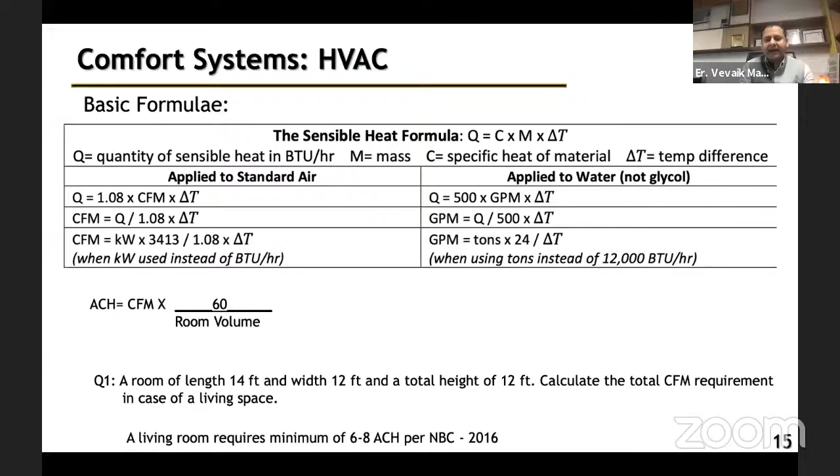This gives an example. If you have a room 14 feet in length, 12 feet wide and a height of 12, how much total CFM do we need? We can easily correlate. Go back to the NBC 2016, pull out the chapter for ventilation, find out the 6 to 8 air changes, whatever we require, and this is the simple formula. The simple formula gives us the total CFM. Once you get the CFM, cubic feet per minute, one can easily go back to the market and see how much total tonnage equivalent we are looking at. So this is the easy way.

So we talked about the unitary equipment, then we talk about the VRV system, जो हमारे VRV system होते हैं, which is a variable refrigerant volume or variable refrigerant flow systems.

These systems are very commonly used in modern buildings requiring a total tonnage of 100 to 300 tons, because they are very easy to install and very efficient. The benefit is the outdoor unit. Many of the engineers among the current attendees might have done the installation or designed these systems. These are widely available in the market, and they have a very high coefficient of performance and efficiency.

These again come as water cooled and air cooled. Air cooled depends on the ambient air, and water cooled, if we have water, definitely has very high energy efficiency because the heat rejection happens through the water.

The next is the water cooled chiller, which is commonly used in centralized buildings like hospitals and malls. Why are these systems utilized in malls, hospitals, and 5-star hotels? Because they are energy efficient. They have an electrical consumption equivalent to 1 kilowatt per ton. Think about the unitary air conditioners we talked about, the window or split air conditioner. From about 2 kilowatt per ton we reached about 1 kilowatt per ton consumption, so these are highly energy efficient. The only thing is they come with a very high capital cost.

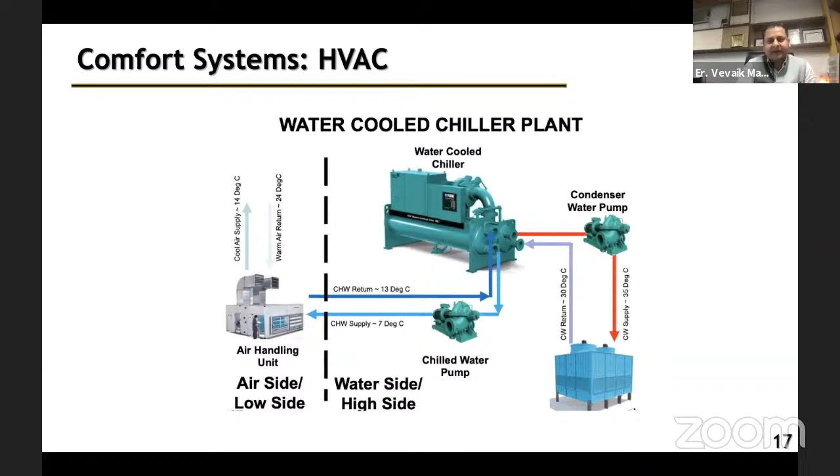The air-cooled chiller is another that you can see sitting on the terraces of buildings. These reject the heat to the ambient. They are utilized in similar commercial buildings and are again energy efficient, with a load of 1.2 to 1.25 kilowatt per ton, and they give very good diversity for the building. Then there is the central chiller plant, with which one can achieve even less than 1 kilowatt per ton. This is primarily what we need to look at when we do active air conditioning and need to install highly energy efficient systems.

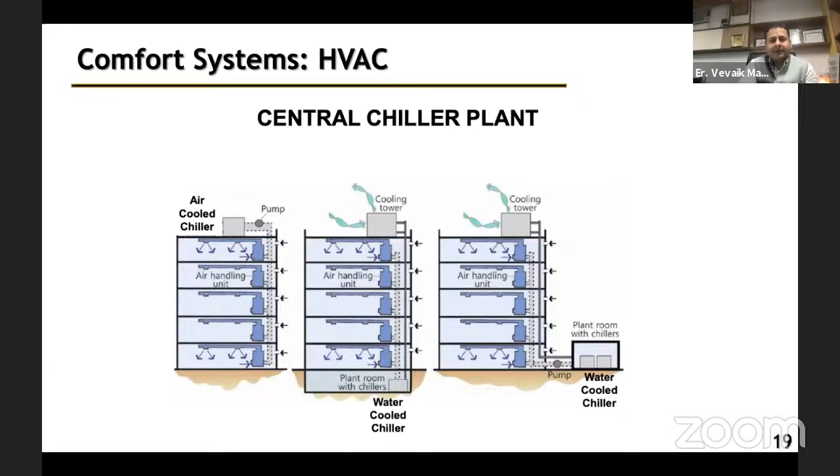So now, as per the NBC or the ECBC of the Bureau of Energy Efficiency, the natural ventilation has to be met, as well as the NBC 2016 minimum equipment efficiencies.

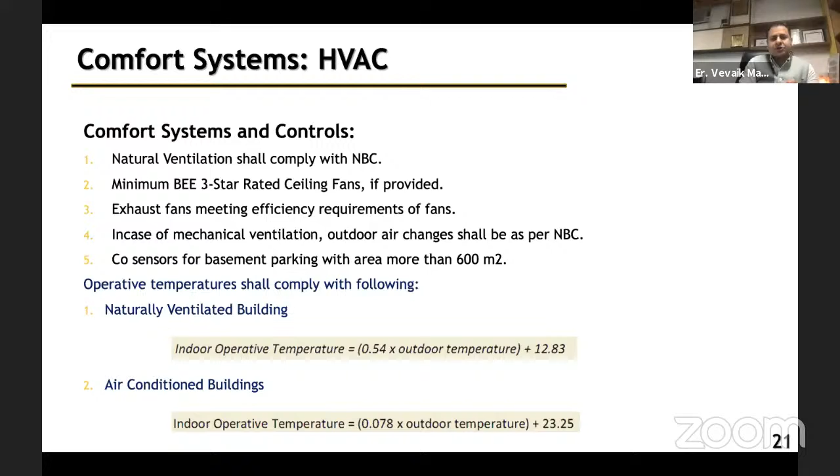So it's our moral duty now to see that our efficiencies all meet those requirements. Then we talk about controls and piping, which are mainly used in large-scale commercial buildings. For the comfort system, there are some basic formulas given for finding the indoor operative temperatures, how we can achieve thermal comfort with natural ventilation, and, with air conditioning, what set points we can achieve. These are some basic formulas that are already there.

I'll just quickly go through the efficiencies. So straightforwardly, we are defining now, as per the latest energy efficiency standards, that for any of the systems we are looking at, the minimum coefficient of performance for the VRV system should be 3.2 at minimum. But nowadays, to be honest, because of these highly stringent codes, there is competition between the makes, between the different VRV manufacturers. The efficiencies are even going beyond 3.6 and 4.

So these are the good things that we are getting just because of fundamentally setting up some sort of norms. Again, there are a few efficiencies that we are defining for the unitary equipment, unitary split package, everything. So if you have an air conditioner of 10.5, one can easily select that it just has to be BEE 3 star rated. And if it is higher than 10.5, simply water cooled can be installed. Air cooled versus water cooled, we have given it straightforward here.

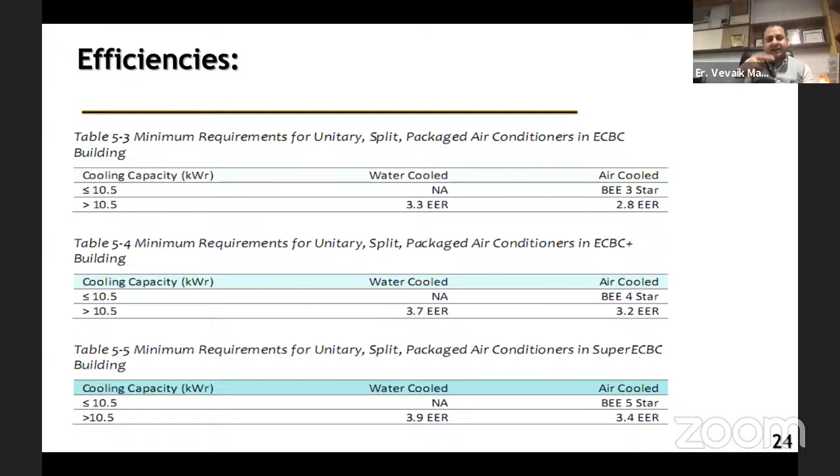And if your building runs, if your total system runs for night hours, the entire full night for 10 hours, think about it, we can save about 15 kilowatt hours. So this is the saving in energy that we are having now. So there are a couple of other energy efficiencies straightforwardly defined in the ECBC code that we can look at.

So yeah, that's all. Stay comfortable and healthy; this is the next goal and the responsibilities that we are defining, and I hope we all try to achieve it at some point with all of our efforts. Yeah, thank you so much, and thank you Ramneek and Surinder sir. That's all from my side.

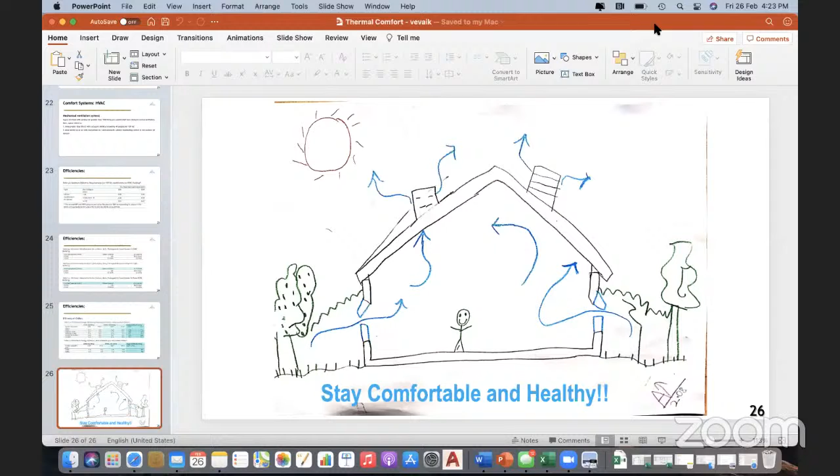Thank you so much, sir. So this was Engineer Vevaik. He educated us on thermal comfort today in his session. A temperature where we feel neither warm nor cold is what thermal comfort is. I really appreciate the caricatures sir used in his PPTs to explain the concept. He also educated us on building envelope, lighting, insulation material and orientation. These are all factors that help us achieve thermal comfort.

The timeline used to explain the concept was commendable, from early man to modern man, and the change in techniques and technologies we've seen over time. And he even explained the systems to achieve thermal comfort in our buildings. Thank you so much, sir.